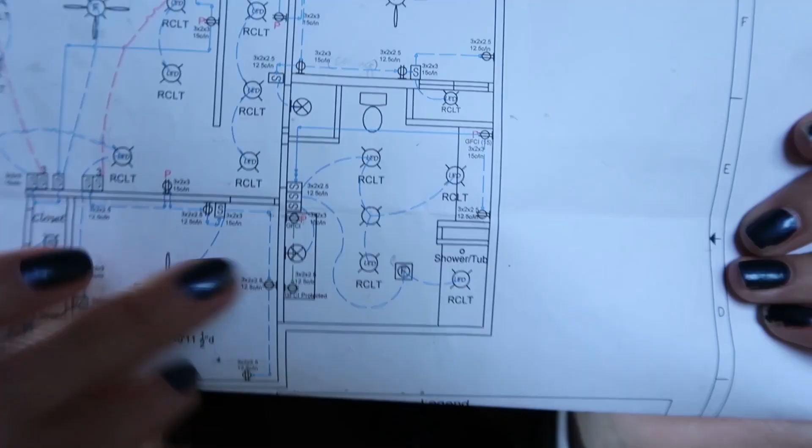We are in the main bath and I have my drawing here. Basically it shows all the circuits in the bathroom, and in the bathroom it's quite simple. There's like, I think 2 different circuits and that's it. So first things first is I'm going to do the easiest circuit, and that is the 20 amp GFIs that will be in here by the vanity here.

And then we actually have one on this wall as well that isn't on the drawing that we decided to add afterwards, because we think because this wall is longer than the 39 inches, we have to have one there anyways. So before the inspector just basically tells us that we have to put it there, we're just gonna put it there, and then that way there's no arguments or, you know, we have to be redoing stuff. So that's basically what I'm going to be doing first.

And Dad did kind of put on here what size boxes I need. However, I still go through and make sure that I know how many wires are coming in, because as soon as you jump up to having like 3 full wires or 6 wires into a box, you have to jump up to a bigger size box because each box is a certain amount of cubic inches inside. And if you just have 1 wire or 2 wires or 2 or 4 wires, I'll explain that in a second what I mean by that, but you only need a small box. So I'll go through, make sure I know what I need, and we'll go from there.

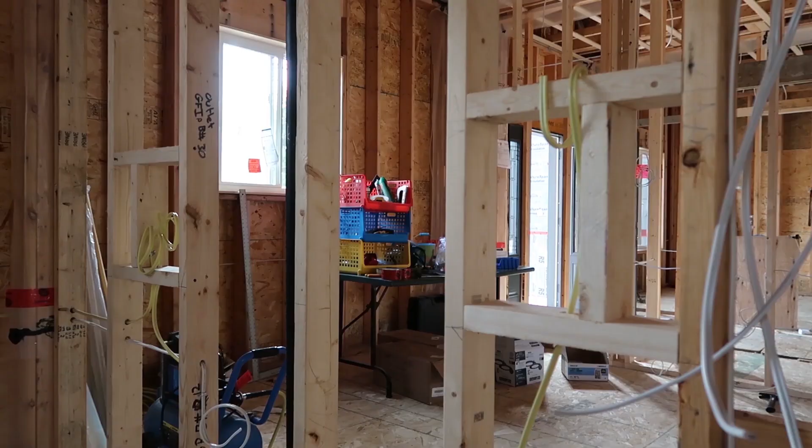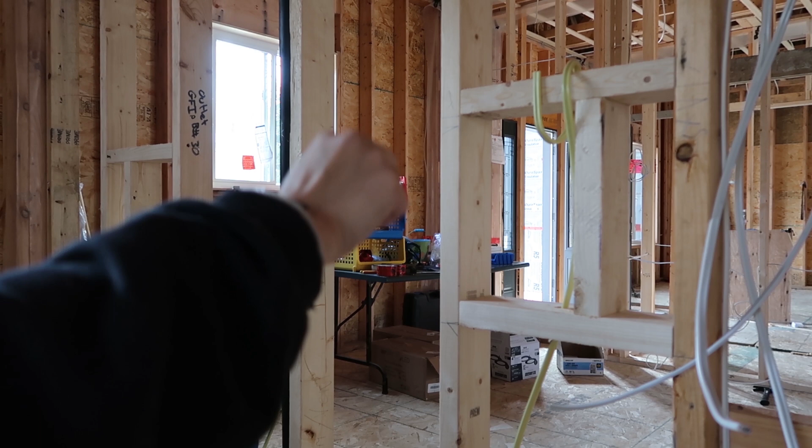All right, so we have our 20 amp yellow wire, 12-2 wire running, and as you can see, this is one box here, and then we'll have another box there, and I believe the home run is this one here, which, yes, down there you won't be able to see, but there's actually an extra hole there to run our home run to the panel.

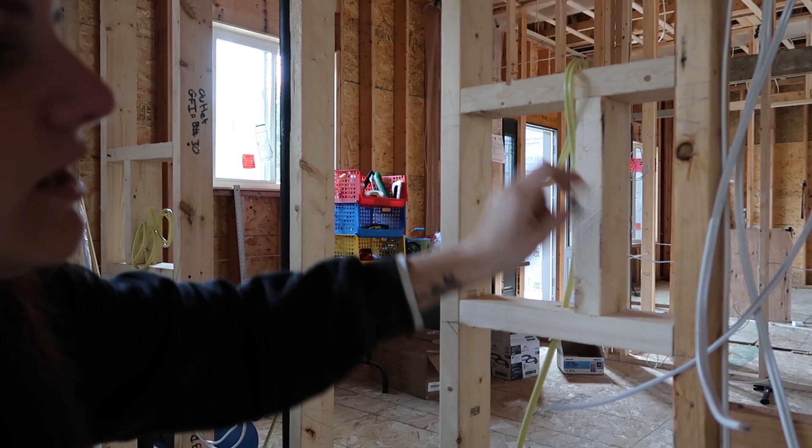So I know I only have 2 of these wires going into this box, but it's actually considered as 4 because there's 2 wires in here plus the ground. But it is a GFI also, and it is a 12 wire. So it is bigger than the 14, so we're actually going to do the bigger size box just because it's easier to fit in the GFIs. So I'll go get a box and we'll start.

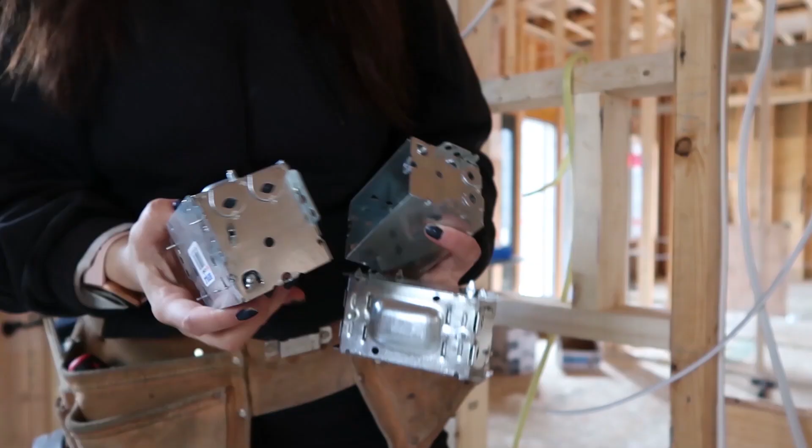All right, so these are our 2 3/4 inch boxes, and you can see that it has this little like bump out which helps with the cubic inches, and yeah, that's our box there that we're going to be using for all 3 of these GFIs. Yeah, it would be hard all of a sudden putting it there and bring the wire up on that side.

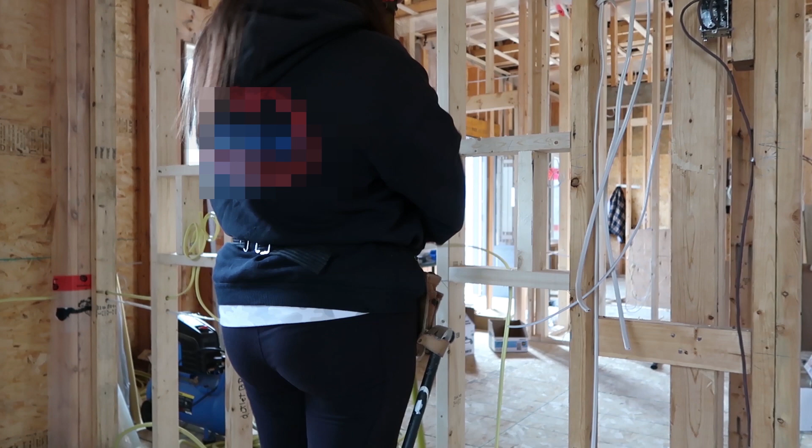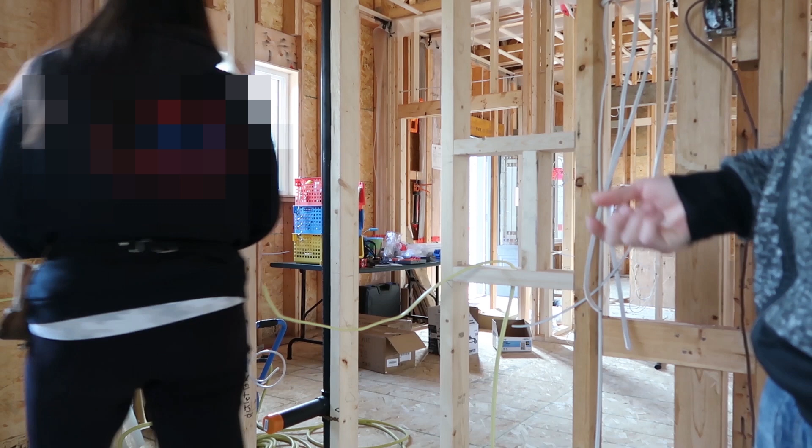What do you want, man? You're a weirdo. Get away from me. Get away from me. I'm gonna hurt you. I need this tape measure. Well, why don't you have the other one? There's another yellow one. It's right there. Can I have it, please? What? Here. We go. It's here. Here, do that. Yeah. That's what happens when you use your husband's tape measure. Yeah, well, now you're using your brother's. I'm kidding. I'm kidding. I believe it's my tape measure. Let me know when you're finished doing that, will ya? Okay. What are you doing? It looks like you're over there sitting on the couch. Okay.

You're screwing up my shot here, man. Okay, I'm just trying to have some fun before I die. You're gonna die if you don't leave me alone. Well, I don't know, man. Just trying to help.

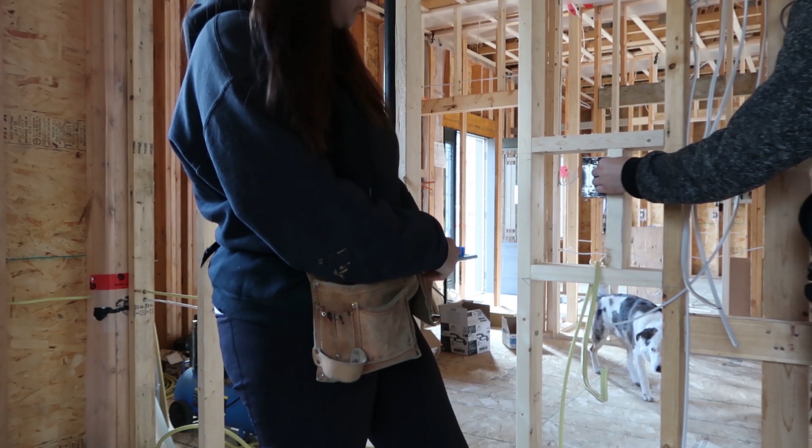They can't, they go through that culvert. Doing it there? Well, it's still pumping the water from one side to the other. So I could try and get to it, but I still pumped all the water, so there's no water sitting there. Okay, hang on. I can see our drains run down from the drains around the house, the drainage tile. I tried finding it, but it's so frozen still that if it fills up again, I'll just pump the water back to the other side because it's draining on the other side.

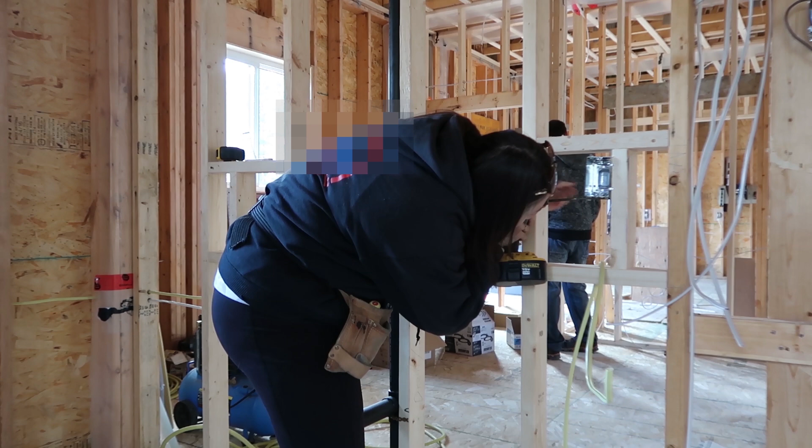Can I have a bunch of these big screws come out, please? Which ones, the box ones? Whatever. The box screws? Yeah. Good, very good.

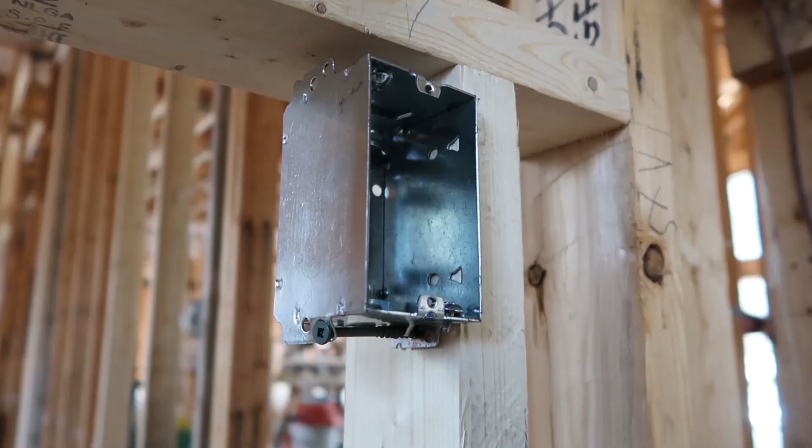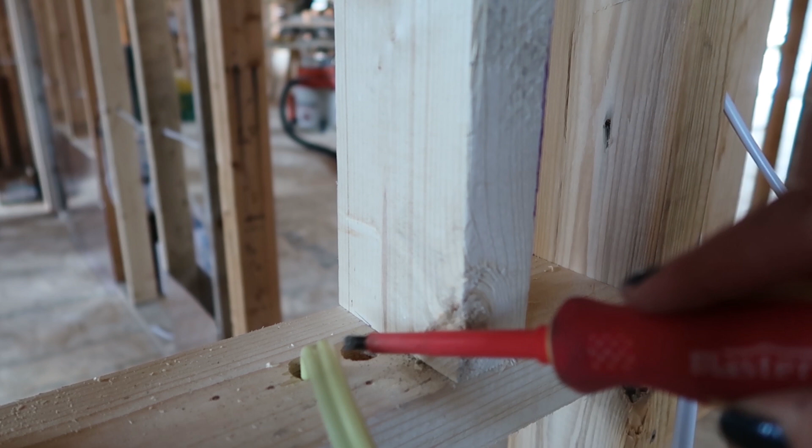Okay, so now that I have my 2 3/4 boxes in, I have to punch out the little punch out here. You can see it down here. Actually, can I get to that part? Yeah, I have that one out, and I'm going to punch this one out too. So our home run from our panel will come through this hole, and this one will come out of the box and then over to the other GFI to power that one.

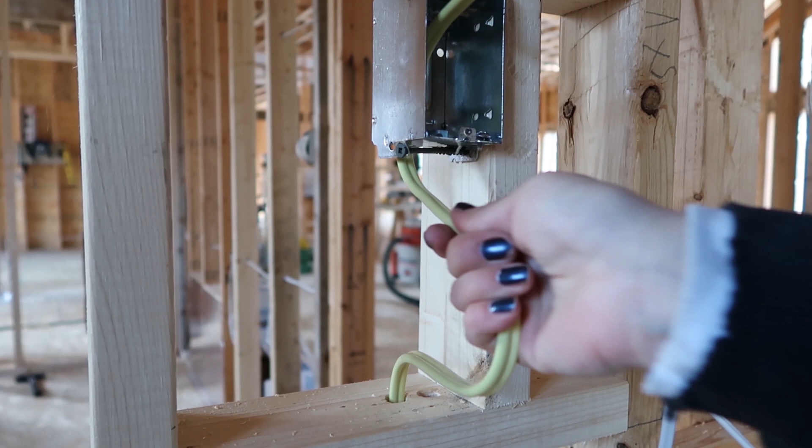But for the time being, because we don't have the home run, I only have one wire to feed right now. I know that's extra long, but I'm gonna leave it, I'm gonna staple it.

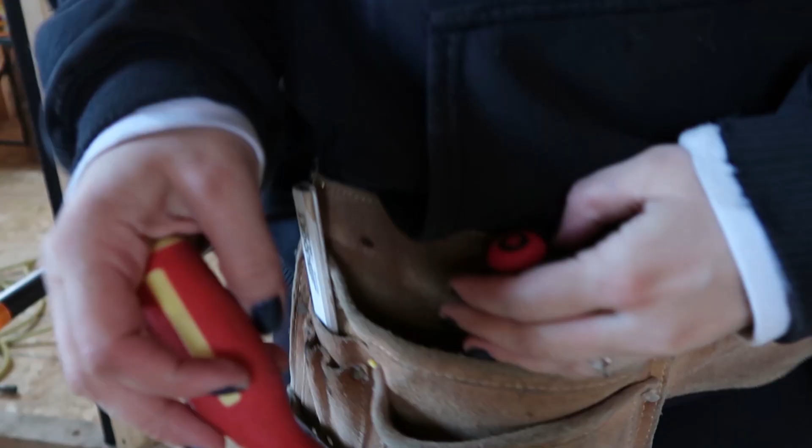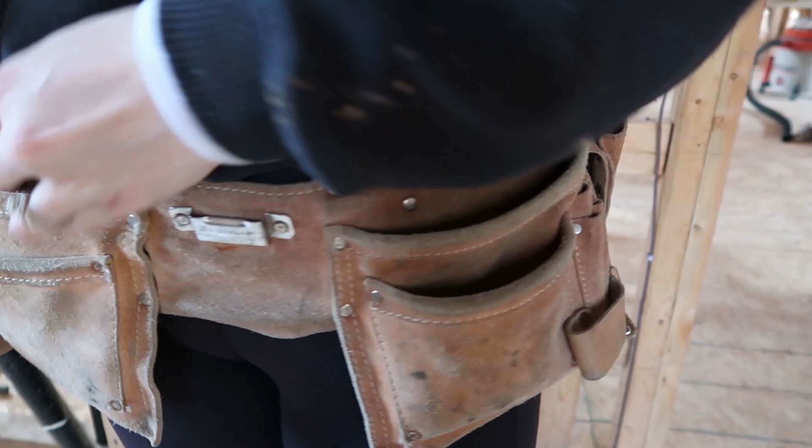So in my pouch, I have a flat screwdriver and a Robertson red, and then I have the big screws for the box. I have my hammer, a pencil, and then in here I have staples, and then I have little screws for areas that we can't get the big ones. And then over there, I actually have a pair of linesman pliers to cut wire and stuff like that. So I'm going to take some of these and staple up this wire.

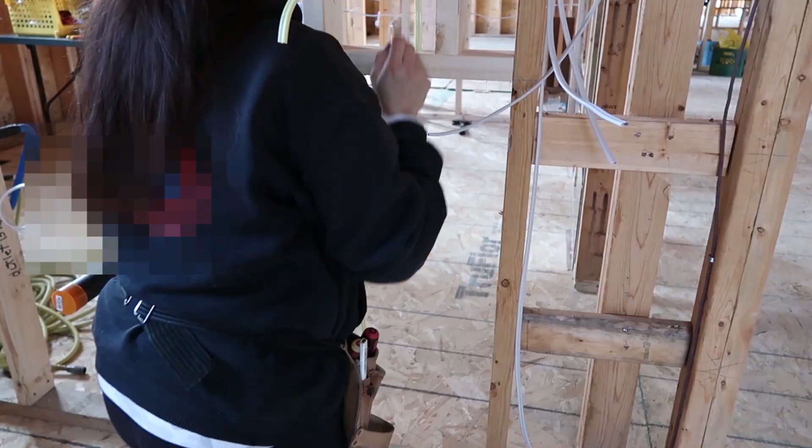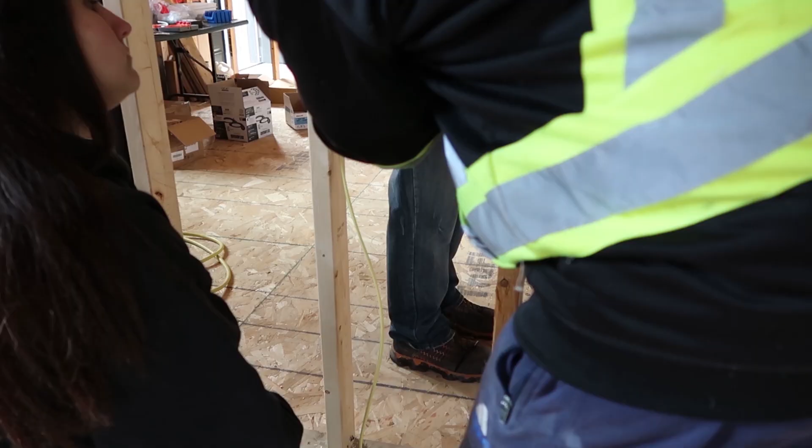Can you get it? Yeah, I was just twisting. There's the wire. Under there. Take one, put it in like that. When you put the other one through, staple it in here. That's not home run, is it? No, this hole is for home run. Yeah. So run this one like that, and then staple here. Okay. That's what I figured you would want me to do.

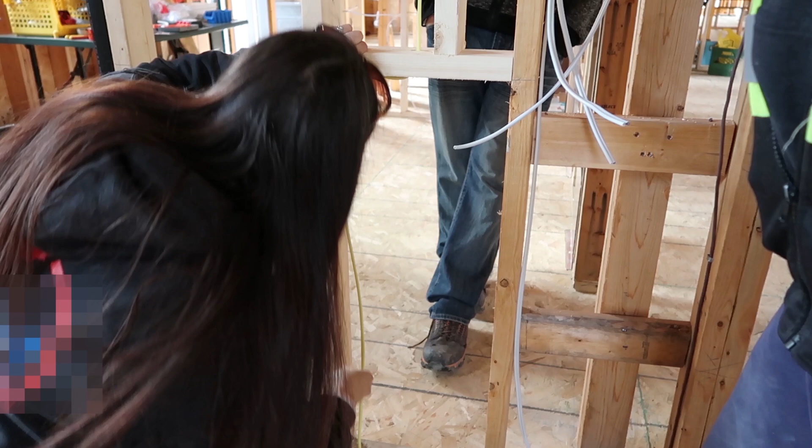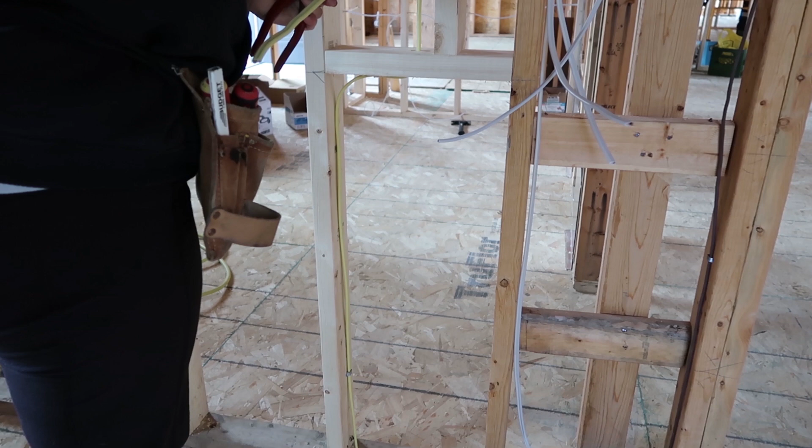Oh, sorry. Really? Okay, so it's not me. I have video proof. Video proof of what? She's got her camera rolling. What are you doing? Yeah. Okay. Well, not every day do they need a big excavator to do something, right?

Okay, I just cut that at the 8, and then I'm gonna tighten up this screw in here.

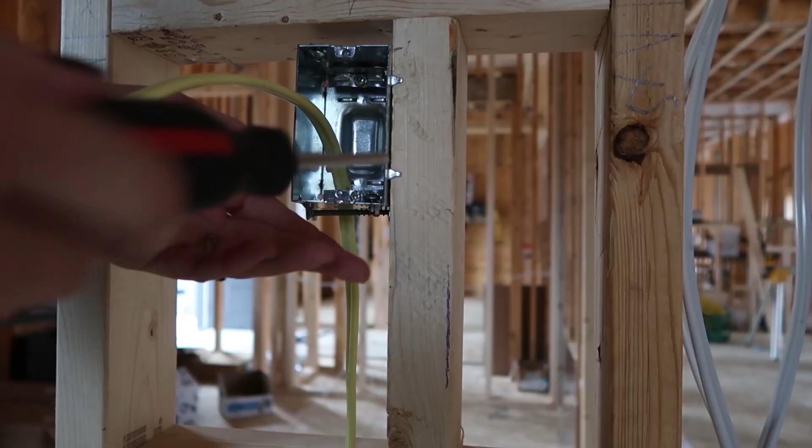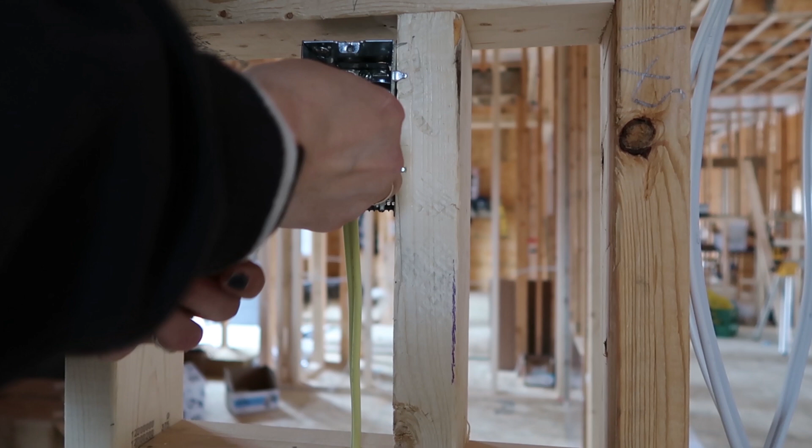Well, he said it like, you know, because I asked him, it was one of the questions, like, do you need to go to school? Do you have to do training? Okay, one down, 2 to go.

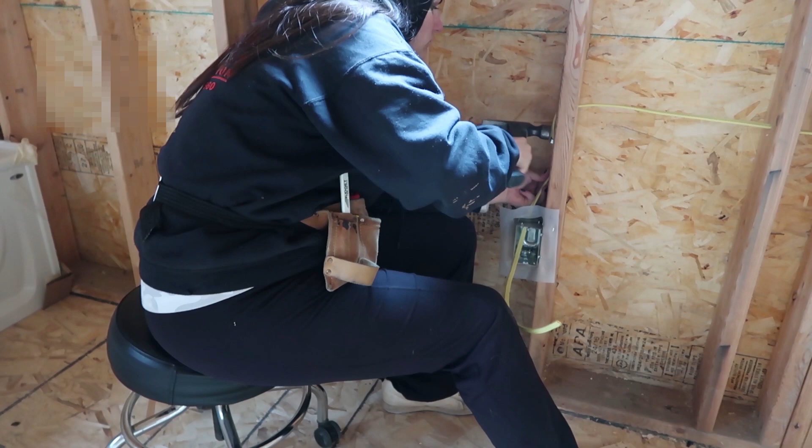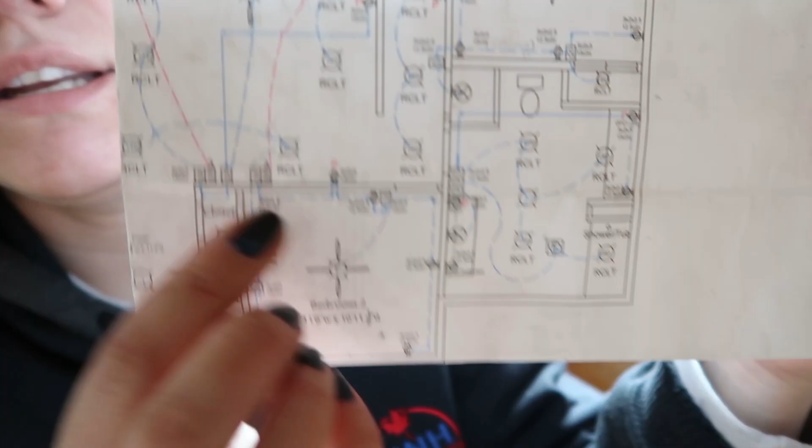So that circuit is done. All we have to do now for that circuit is run it to the panel, which will be done when the boys do the panel. So moving on, now I have to work on the rest of the bathroom, and it is all of the blue or teal colored wire.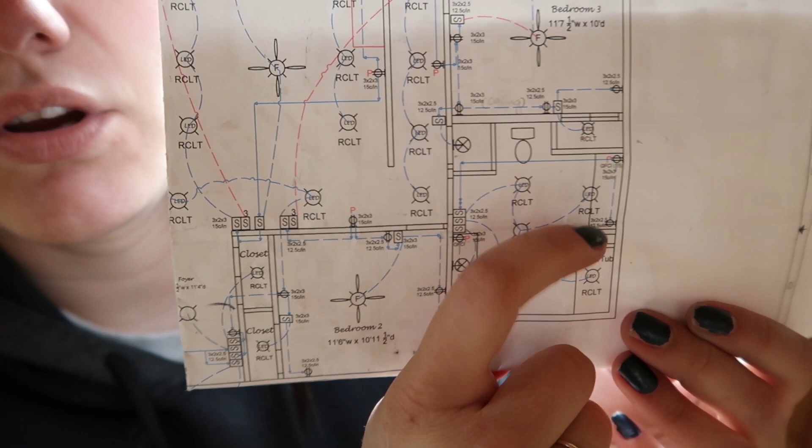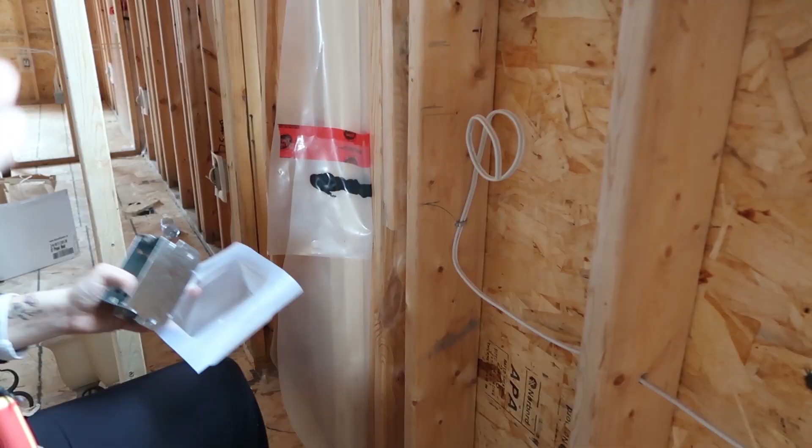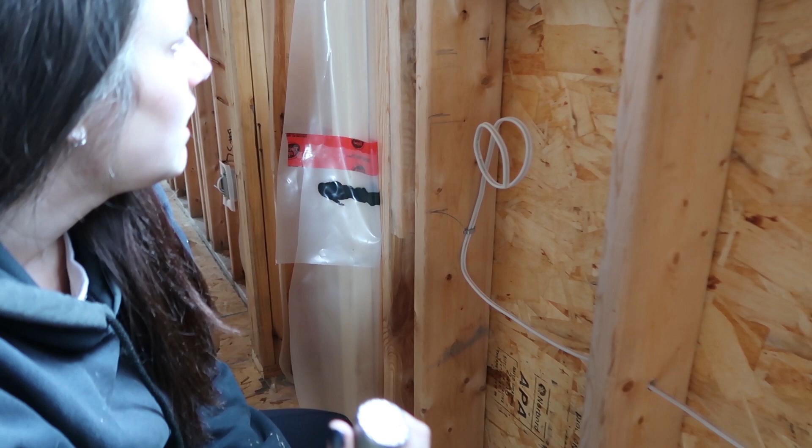And of course, it's an outside wall, so we have to do the vapor barrier box again. Okay, so the way we've been measuring the heights of normal size boxes is actually a hammer height. So you just put your hammer there, put a nick, and then you know exactly where your box height is. However, this is a makeup vanity, so it is actually higher. We have so many lines. Anyways, yeah, so this is the height that we're going to be running it at.

So because this is a home run, we will have another wire go straight down to the floor. Okay, and then this one runs over to the next one.

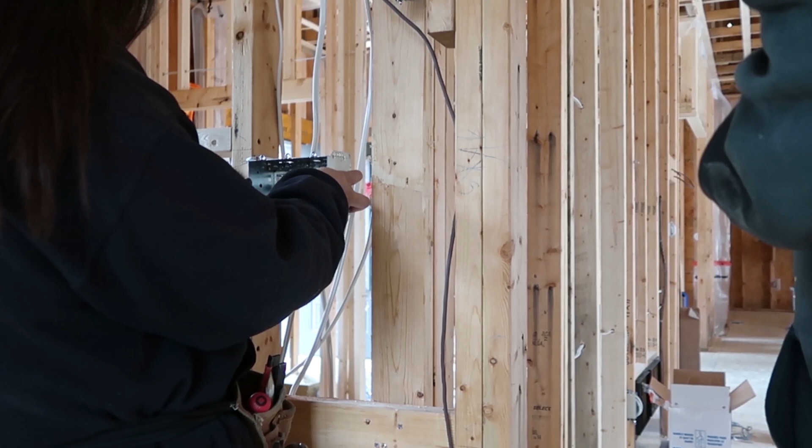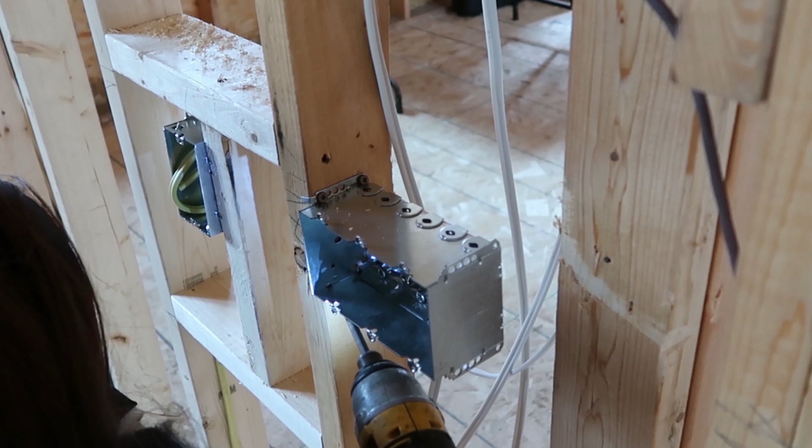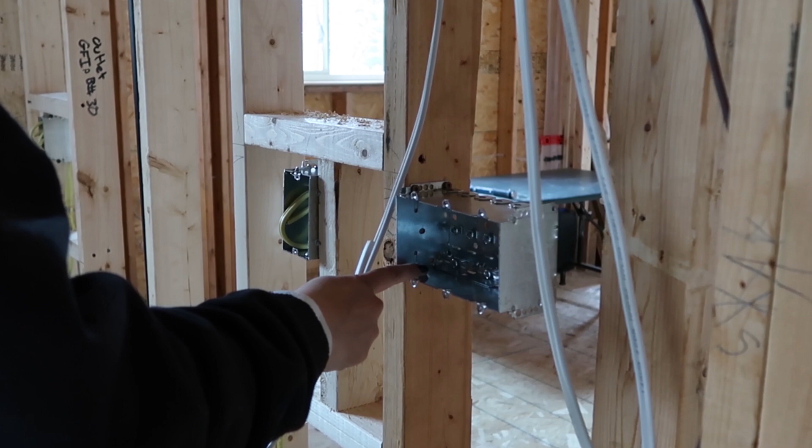Gonna start with the vanity because I know that power comes in. So if I bring power up in here, he'll pigtail. You got a big enough stick there, D? Not big enough stick.

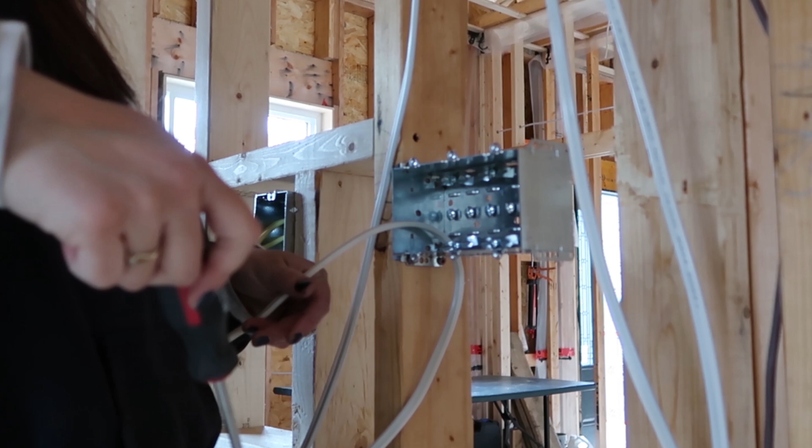Can you do me a favor? Can you go downstairs in the crawl space? What you're gonna look for is I'm gonna wiggle this wire. I think it's right along the beam. It comes from over there. You're gonna make sure that there's just enough, maybe take some staples with you, and you're gonna staple it to the beam so that I know how much wire I can use. If you have to, call me. You'll be able to hear me better over the phone than anything.

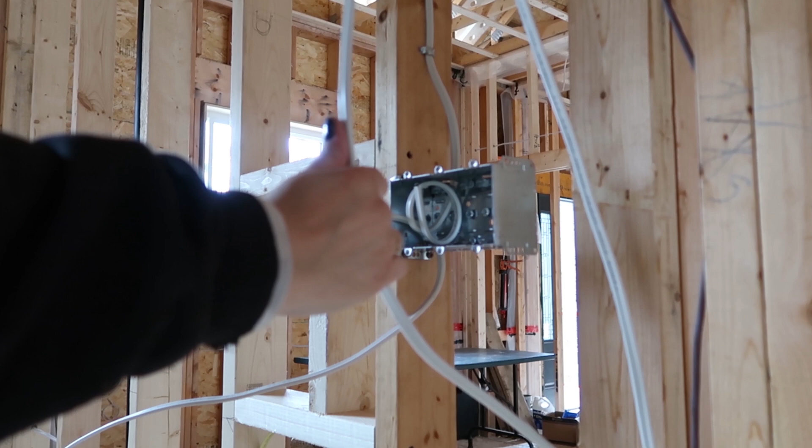Hi. Okay, so what I told you to do is start from the other end, and I want you to staple across. Okay? So only staple every 4 feet along the beam. But make sure you have nice, clean loops, and don't make the wire kinked, like tight, because you have lots to work with. Run it along the beam. Make sure you have lots. And let me know when I can pull this.

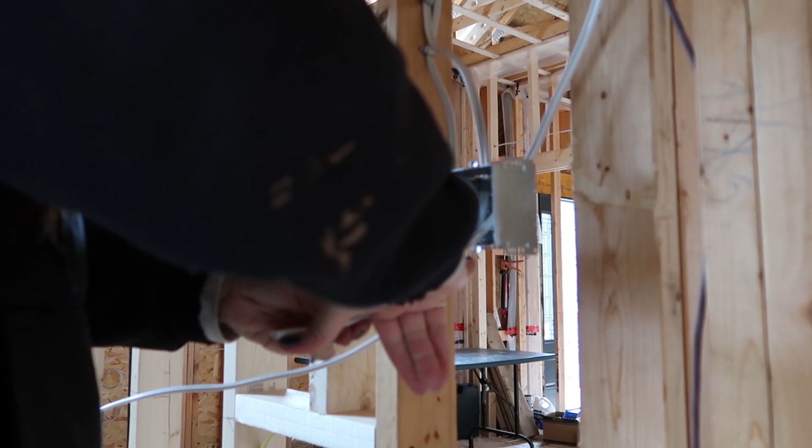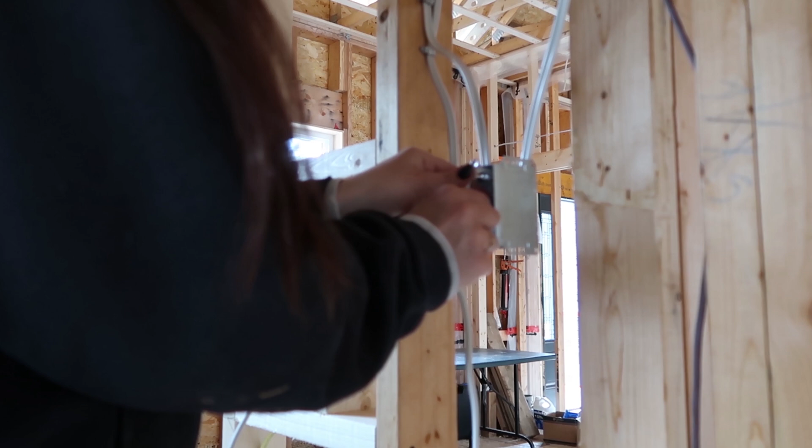Okay, so can I pull this now and you can make sure that it's good? Okay, just 1 second, I'm just tightening the screw. Okay, is that good there? A little wet. Yeah. So it's good, right? It's not too tight down there? Okay. Okay, that's all I need to know.

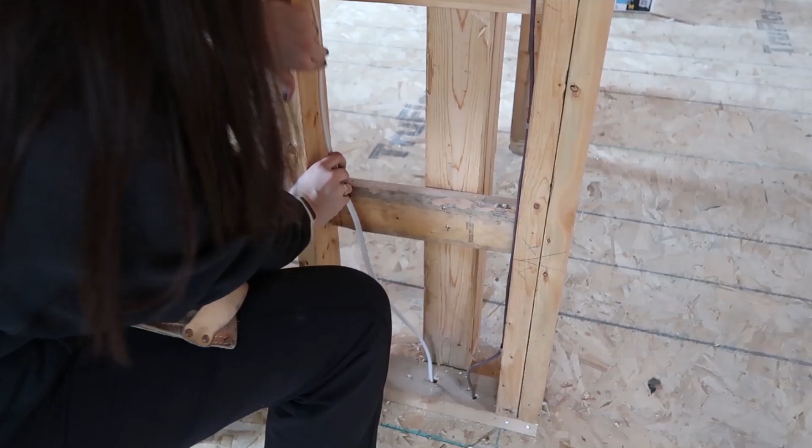Thank you. Okay, so Kyle just made sure that this wire, it's running along a beam down in the crawl space. Made sure it's all good so that I can staple this up here. And I'm actually going to use this backing as an advantage. Okay, I need you to get a ladder.

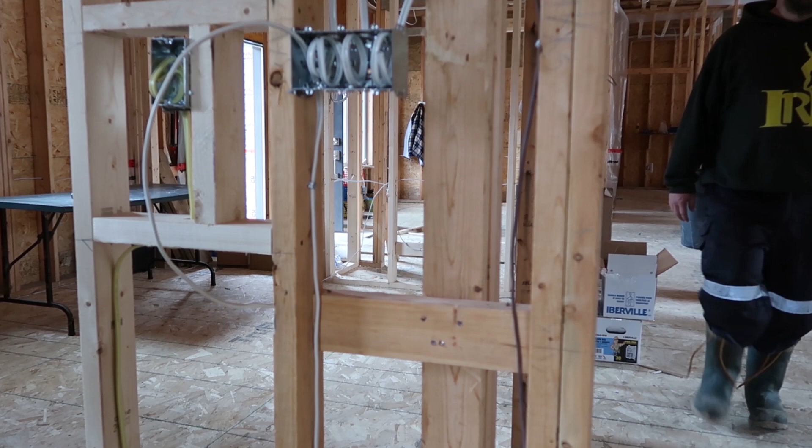Oh, sorry. I actually put it there. I should have known. So first off, I have to go. Quarter to 1. And then Matthew's coming with me. I'm going home and then you guys are gonna have to work together or something. Well, I'm almost done this room. Well, actually, I'm pretty much done it. So, I just need... And then you and I can... Kyle's coming, right? Kyle has to leave too with you? I don't know, I was walking home, man. I didn't know. Okay. I'm driving, so...

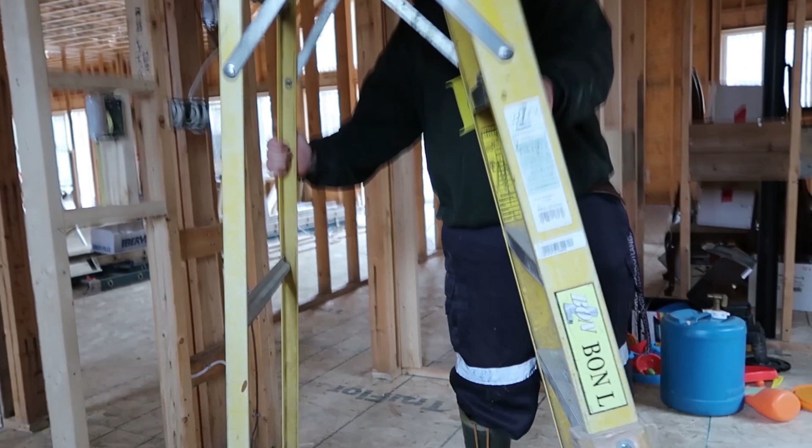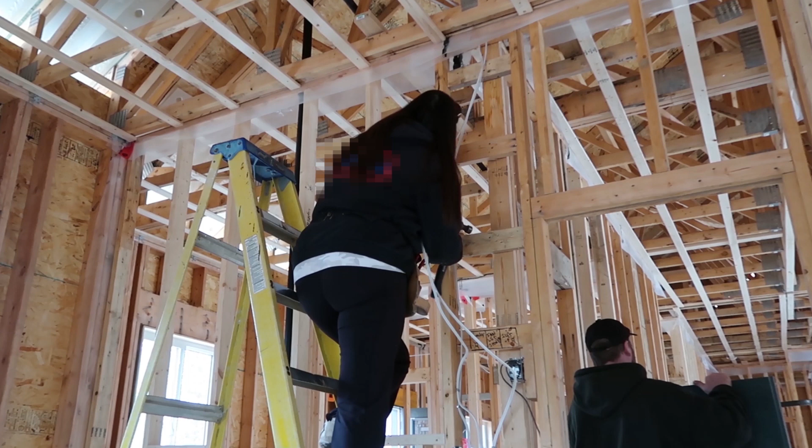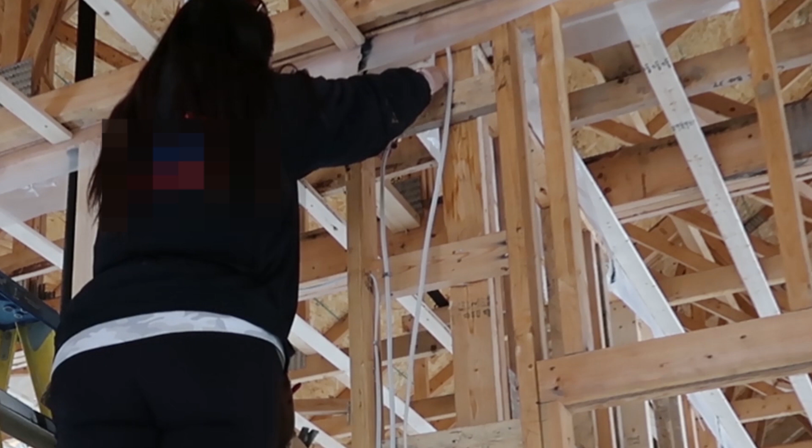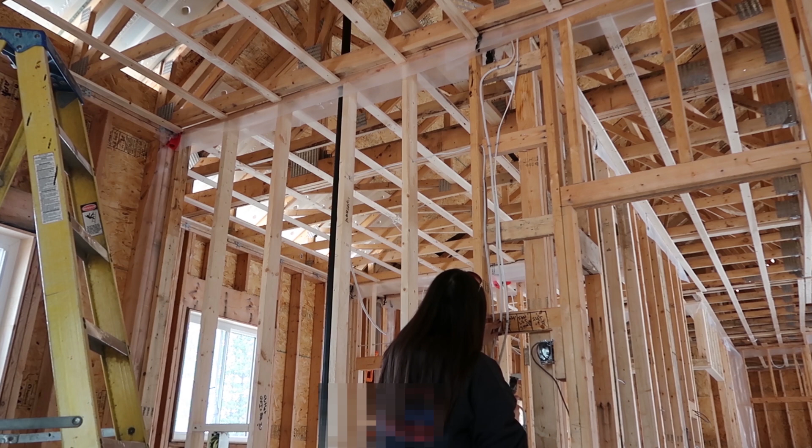Okay, so all these wires are loose from the box. So what I'm gonna do is take these wires and pull them taut up to the ceiling where they run to, and then staple them up. Okay, this room's complete.